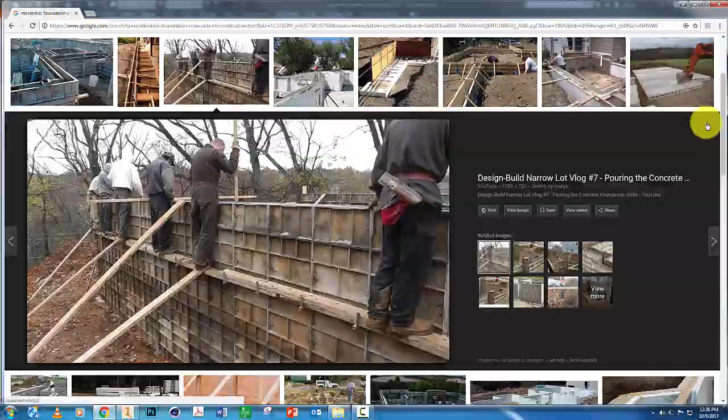At this stage of construction, this is how the footings would look. And when everything's dry, the foundation crew comes in again and starts tying longer pieces of rebar to these L-bars. Then they put forms. Forms are built as the rebar gets tied together. The concrete is poured into the forms. And the forms are removed when the concrete is cured somewhat, usually in a couple of days.

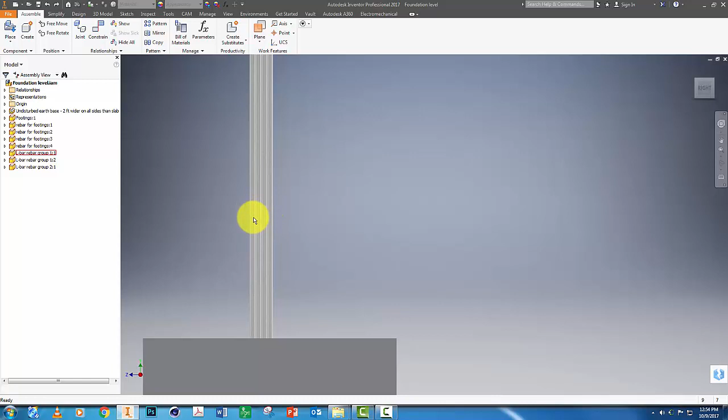As we check different views of our model, the right side view, for example, when I zoom in, this rebar should be in a straight line, and instead I see 3 pieces of rebar here. That tells me that it's not lined up straight. So what we need to do is go back to the home view. We need to add one more constraint to the other side of these rebar configurations to straighten it up.

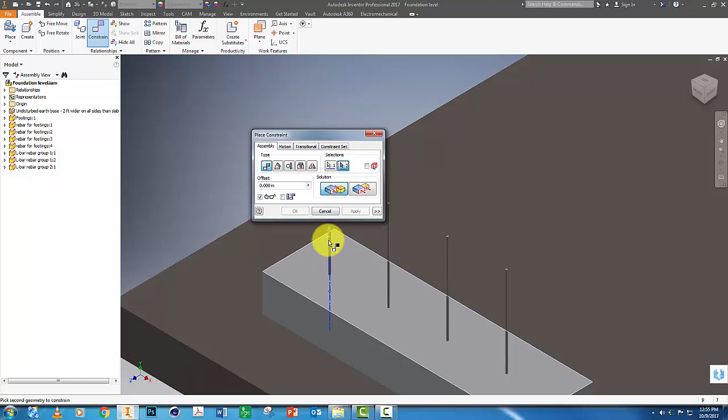Here's how it's done. You zoom in, leave it on Mate Constraint, and pick this piece of L-bar on the other side of the footing. Click this surface of the footing and tell it to also be minus 10 inches. Click OK. Do the same thing to the other two. Constrain, center line to this surface, minus 10. OK.

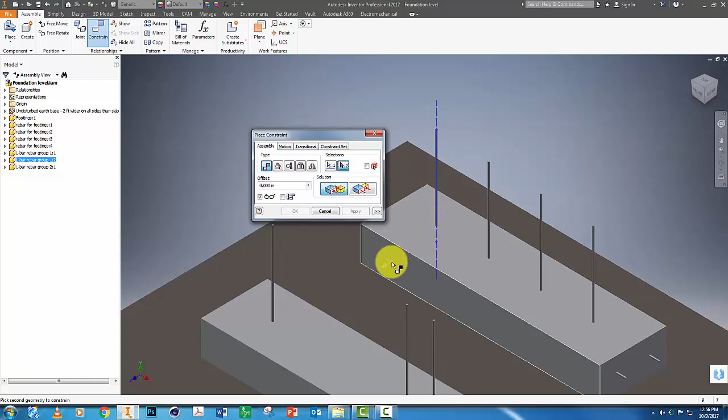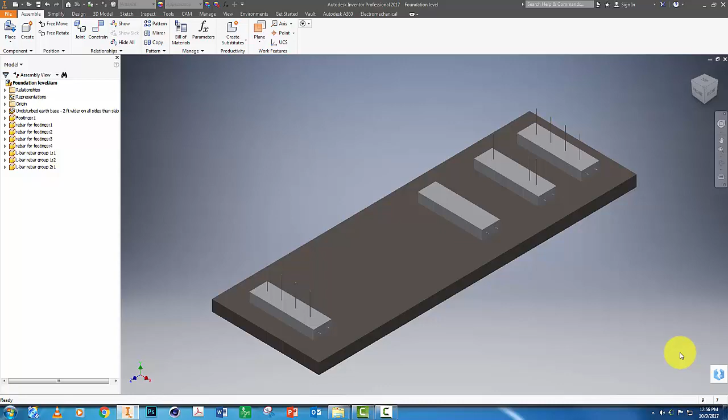Now when we look at these from the right side or the left, you can see they line up. We're now ready to add our horizontal and vertical rebar that will reinforce the foundation wall. Let's start with the file called Rebar Solid Wall. So I went to Place, put one copy of that in your assembly, and press Escape.

This solid wall will be out here on the far side of the porch. Here we have vertical rebar that's 16 inches on center, and then we have 1, 2, 3, 4, 5, 6, 7 pieces of horizontal rebar, which is what was specified in our chart that we looked at.

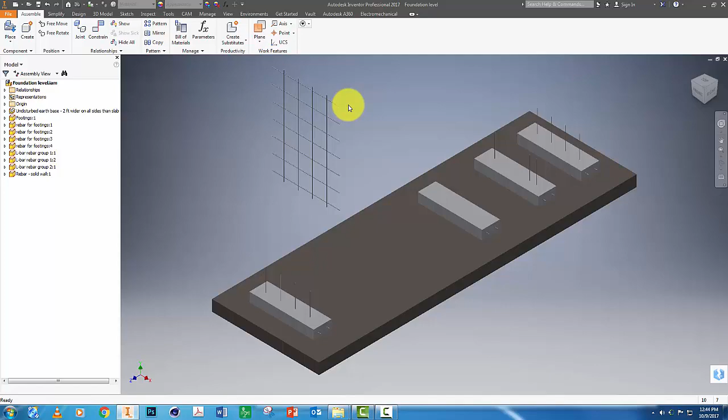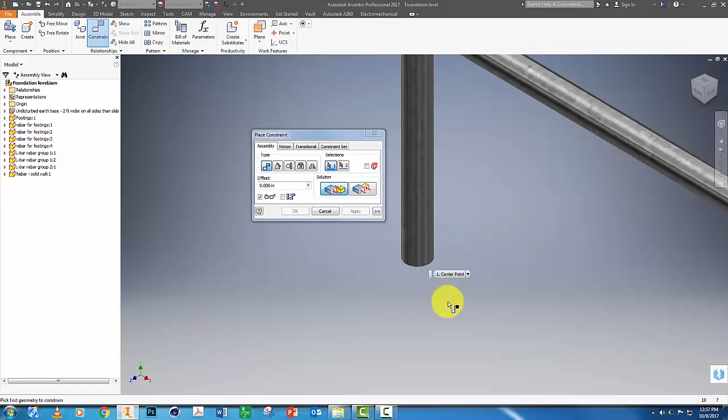Click Constrain, leave it on Mate, and instead of the center line, I want to select the bottom of the piece of rebar. If I hold my cursor just right, it won't get the center line, it will get the actual bottom of the rebar, even though I can't see it. So click that, and then click the top of this footing. Click Apply.

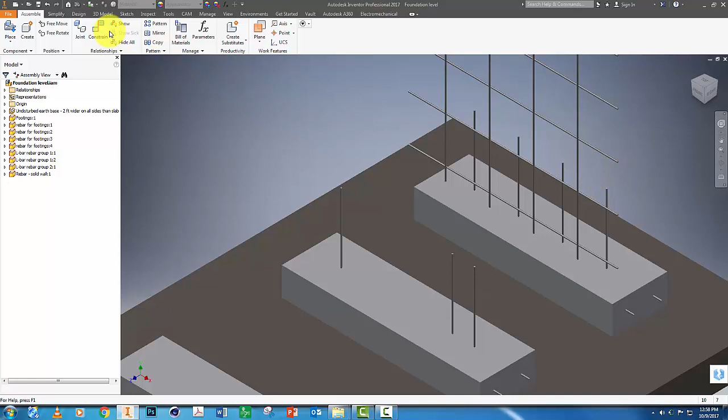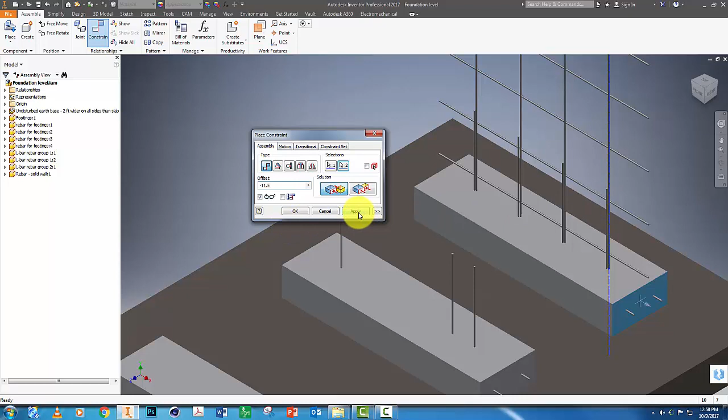I found it's easier to center this rebar configuration the same way we did our L-bar configuration. So rather than try to assemble it to the L-bar directly, I'll go like this. Constrain this piece to this side of the footing. And we don't want it to be right here with this one, so let's type minus 11.5 inches. And it'll put it right next to that piece so that it could be tied together. And then click Apply. Now let's center the rebar in the footing.

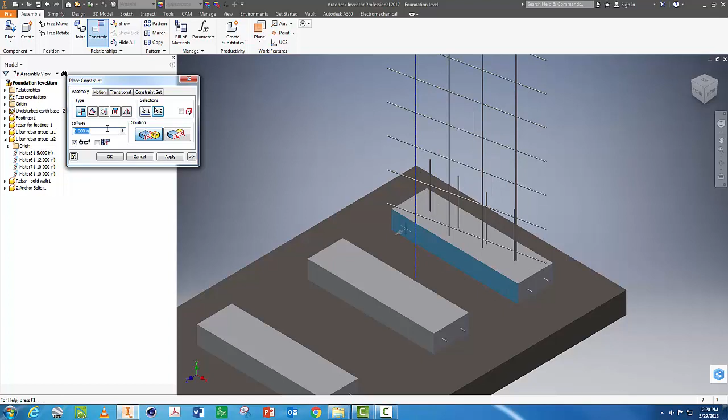We'll leave it with our default mate settings. Select the center line of this side with the front of the footing. And so it's not right on top of the other rebar, let's go minus 10.5. Click Apply. And then do the same to the other side here. And then click OK. In actual construction, these pieces of rebar would be placed close together and then tied with wire.

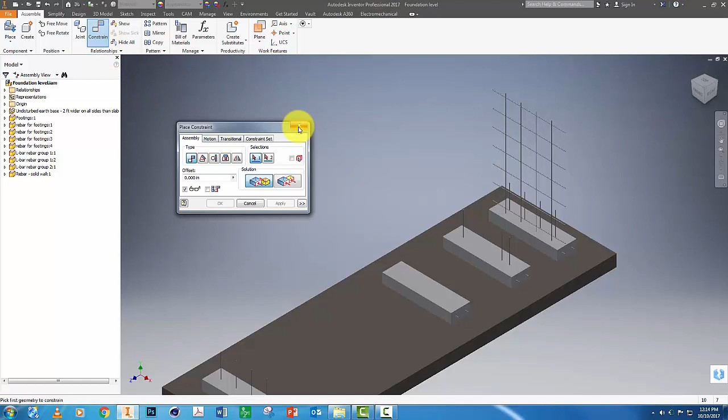As you work on this project, if you try to assemble Inventor parts together, if you have problems getting your assembly to work as shown in the videos, come over here and select your Inventor part and delete it and place it again.

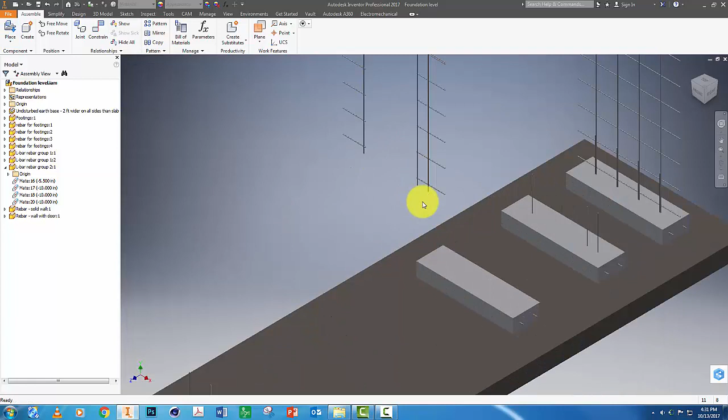Next, let's place the rebar configuration that goes on this footing where the doorway will be that goes into the porch. Go to Place. The file is called Rebar Wall with Door. Place one copy. Our first constraint will be the bottom of the piece of rebar, not the center line, to the top of the footing. Click Apply.

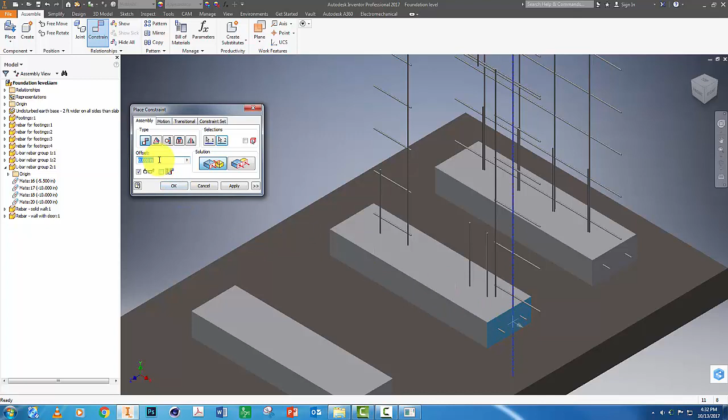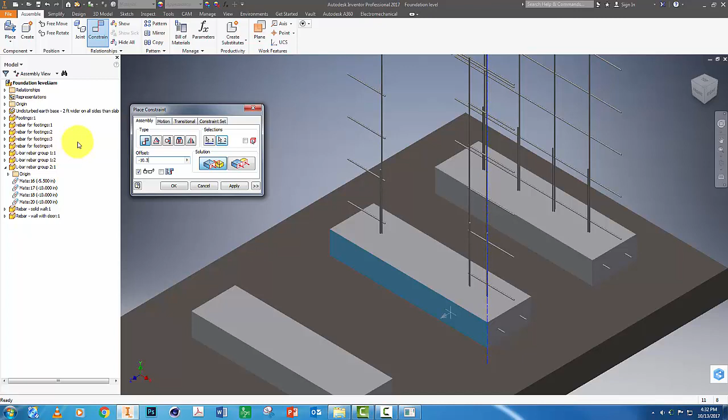Our next constraint, click this vertical center line and the end of the footing and set the distance to minus 10.5. Click Apply. And last, select the same piece of rebar and the side of the footing and enter minus 10.3 and click OK. This positions the rebar in a realistic way.

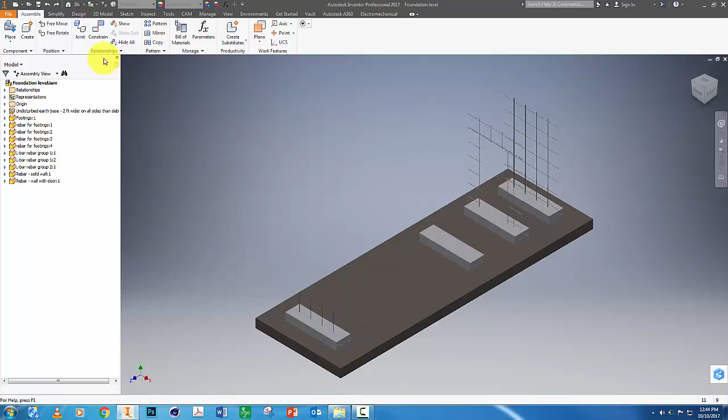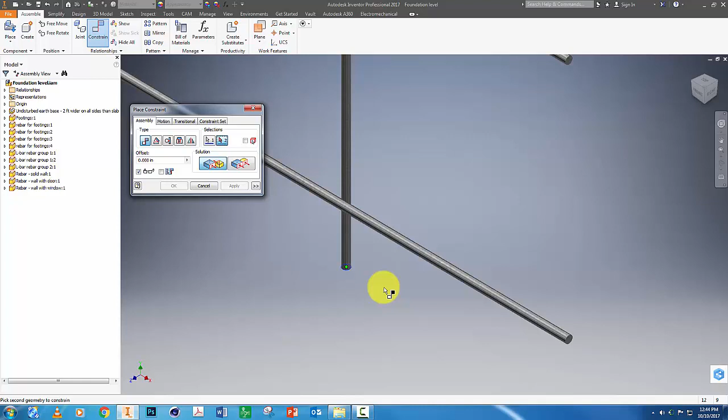Now let's add the last foundation wall rebar configuration for this area. This will contain a window in our foundation wall. Place. The file is called Rebar Wall with Window. One copy. Press Escape. And we'll start the same way by constraining not the axis but the bottom of the piece of rebar to the bottom of the footing. Apply.

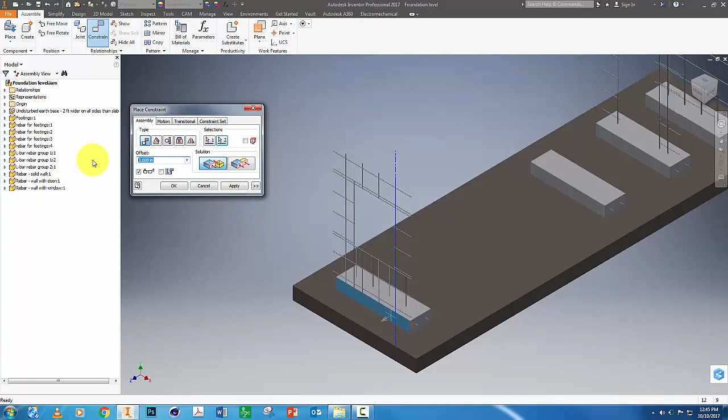Then this vertical piece to this side and use a value of minus 14.3 to get this particular configuration to line up. Apply that, and then one more constraint, that axis to this side of the footing, and let's use minus 9.7 as our distance, and then press OK.

And that gives us a realistic scenario that looks like real-world construction. Except we aren't showing our wire ties here in Inventor. You can just imagine that they are there, holding all of those joints of rebar together.